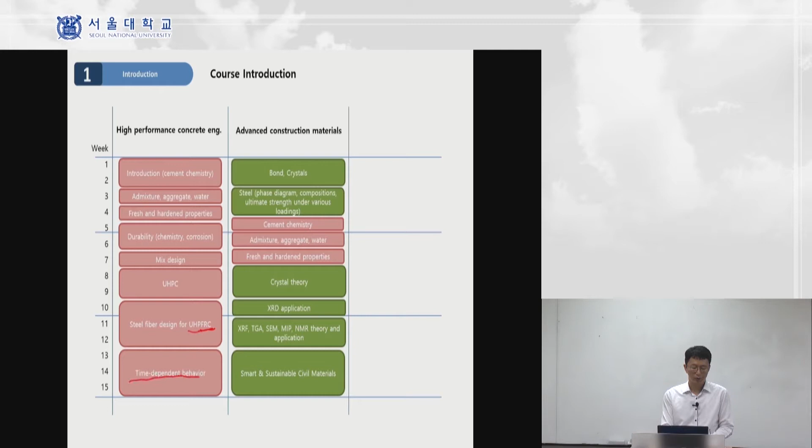In this class, high performance concrete engineering, basic knowledge on cement chemistry will be given, and how to produce the concrete materials - we have to mix aggregate and water and cement and also other admixtures together. So all these material properties of each ingredient of the concrete materials will be covered. Also mix design for typical strengths of concrete material, and mix design for high performance concrete material and ultra high performance concrete, and also ultra high performance fiber reinforced cementitious composite or fiber reinforced concrete will be covered, and time dependent behavior will be the last topic of this class.

So let me tell you first why concrete is so complicated and so difficult to predict its material properties. Let's see - this is very typical, the most important material property of concrete material is the strength, right? Concrete strength.

So if I want to build bridges or I want to build an apartment, then we have to design - we have to satisfy the strength of the concrete materials. Then what kind of procedures do we have to follow, what kind of mix proportion, what is the requirement for each ingredient of concrete materials - we have to decide, right?

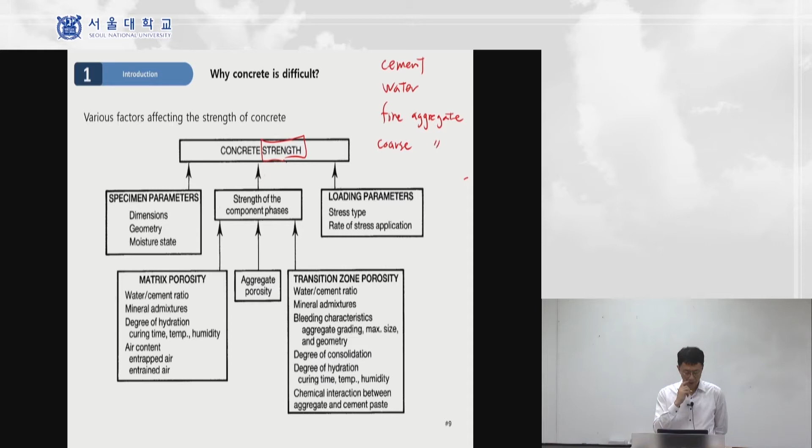So that can be the cement and water, the fine aggregate, and coarse aggregate. So cement and water, fine aggregate and coarse aggregate - among these 4 ingredients for concrete materials, only the reacting component is the cement. There's no chemical reaction between fine aggregate and water, or fine aggregate with cement. Only these 2 - cement and water - have some kind of chemical reaction.

These are inert components. So this is the basic ingredient of concrete materials, and you will see in this class later these components are getting more and more complicated because of many issues that I will explain later.

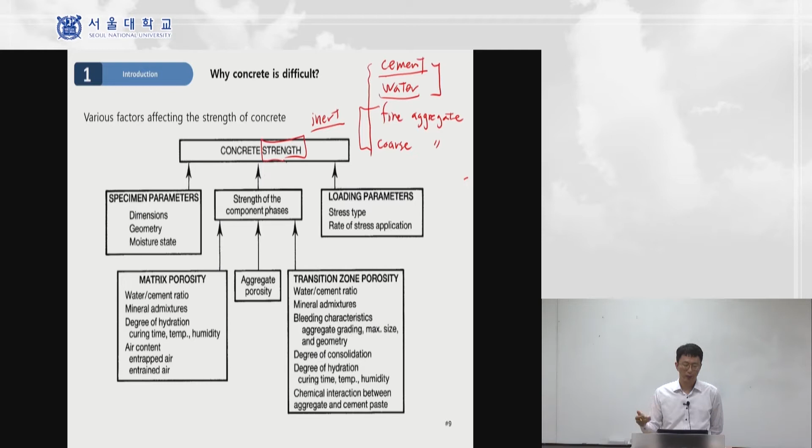So let's see, we have to determine the strength of concrete, FC prime. This is the compressive strength of the concrete materials at a certain date - it can be 28 days or it can be 7 days. But these are all variables that will affect the concrete strength. If you test a different shape of specimen, then the strength will be different. If you test a cube specimen versus a cylinder specimen, the strength will be different.

Now, that is a natural phenomenon of concrete materials. If you apply fast loading or slow loading, or different loading conditions, then the concrete strength, as a result of the measurement, will be different. That's also a natural phenomenon of concrete strength. And also the matrix - if you see the matrix porosity, that means as a result of the chemical reaction between the cement and water, it will be cement hydrate.

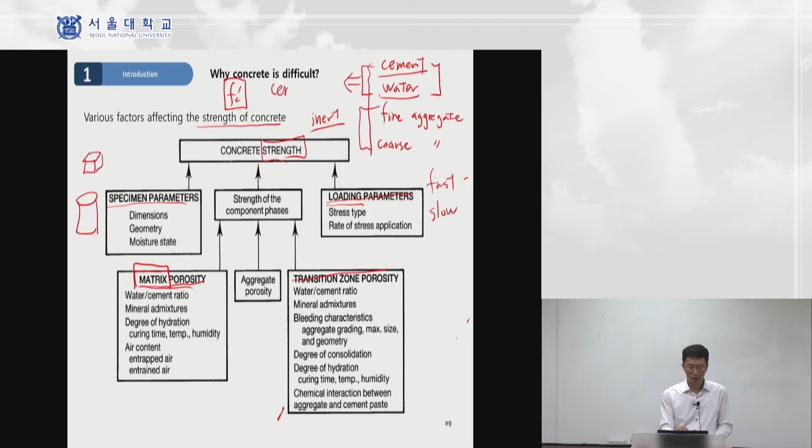Cement hydrate, that is what we call the matrix. Matrix porosity also affects concrete strength. What kind of variable determines matrix porosity? Water to cement ratio, mineral admixture, degree of hydration, curing time and temperature, humidity, air content - all these parameters affect the matrix porosity, and this affects the properties of the cement hydrate.

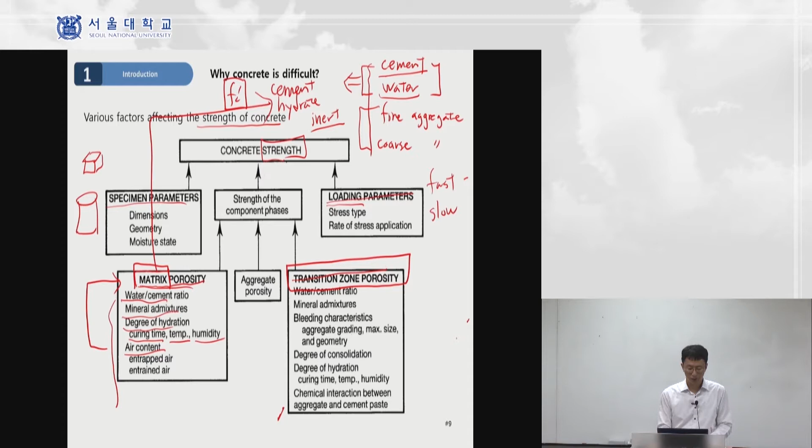Even more difficult factor is transition zone porosity. There are even more variables affecting the transition zone porosity of the cement hydrate. So let me draw a schematic diagram of concrete materials.

This is the volume of concrete materials, and we have coarse aggregate. Then the remaining volume is supposed to be filled with fine aggregate.

Typical size of the coarse aggregate is 25 millimeter, so you can get a sense of the scale of this material. Fine aggregate is less than a few millimeter - few millimeter to 2 to 3 millimeter. So this is the scale of the concrete materials.

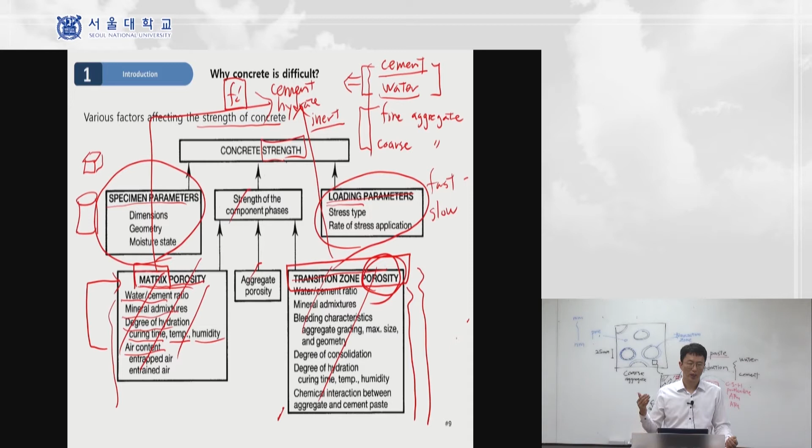Anyway, in one line, concrete material is very heterogeneous and very complicated material. This is the reason why we have to learn about concrete and concrete structure at the graduate level, or even at the undergraduate level class, or even for graduate class, like you guys.

This is the cement factory, a modern cement factory. As you can see here, we start to burn limestone, which is CaCO3, at very, very high temperature.

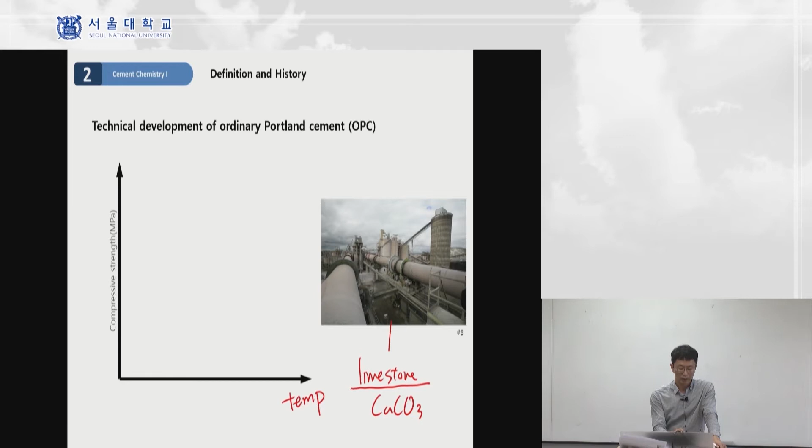This is the temperature we use today, but at early ages, for example the age of ordinary Portland cement, which we call OPC, it's already been 200 years. If you imagine the situation 200 years ago, it was very difficult to burn limestone at very high temperature because they were not trying to burn a small quantity, but a huge quantity of limestone materials.

So there was definitely a technical challenge to burn a huge quantity of limestone at very high temperature. At that time, for example 200 years ago, the firing temperature was not very high, so the cement quality was very low. But nowadays, we can use this kind of technical system to burn limestone at very high temperature with great quality control and huge quantity, so the quality will be increased significantly.

At that time, it could be less than 600 degrees Celsius, but nowadays it is more than 1450 degrees Celsius. As a result of this higher firing temperature to burn limestone, a raw material for cement, we were able to increase the quality of the OPC. And as a result, we can increase the compressive strength and other properties as well, such as long-term performance, tensile capacity, Young's modulus—all these mechanical properties were increased by increasing the firing temperature of the limestone. So this is the brief history of the cement material.

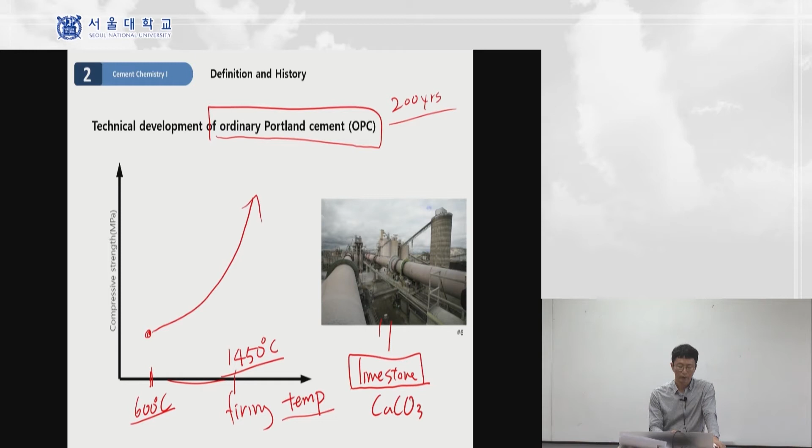Let's take a look at the formulation of modern cement, OPC. We have to mix clay and limestone together, and burn that mixture at a very high temperature, such as 1450 degrees Celsius, in a very huge quantity.

We can imagine this is very difficult to uniformly burn the huge quantity of materials. This is definitely a technical challenge, because some regions' temperature will be higher than 1450, and some regions' temperature will inevitably be lower than 1450 degrees Celsius. Anyway, we have to heat this mixture of clay and limestone at very high temperature, and we gain this kind of material.

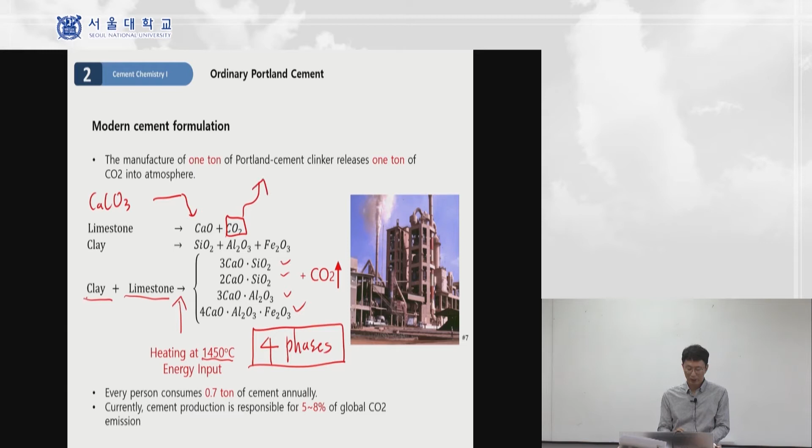These are called phases. Mainly we get 4 main phases. Limestone will decompose, because limestone's chemical formula CaCO3 decomposes into CaO and CO2, which is released. And the clay's oxide composition is mostly silica, alumina, and ferrite.

So this one is silica, alumina, ferrite. Si means silicon, SiO2 indicates silica, Al means aluminum and Al2O3 means alumina, and Fe is iron and Fe2O3 is ferrite.

So OPC, ordinary Portland cement, is not a single material. This is a mixture of these 4 phases. Then what is the mix ratio of these 4 phases? You will learn in the next lecture about the impact of changing the weight ratio of all these 4 phases, because they obviously have different chemical reactions, which will impact the properties of composite materials in different ways.

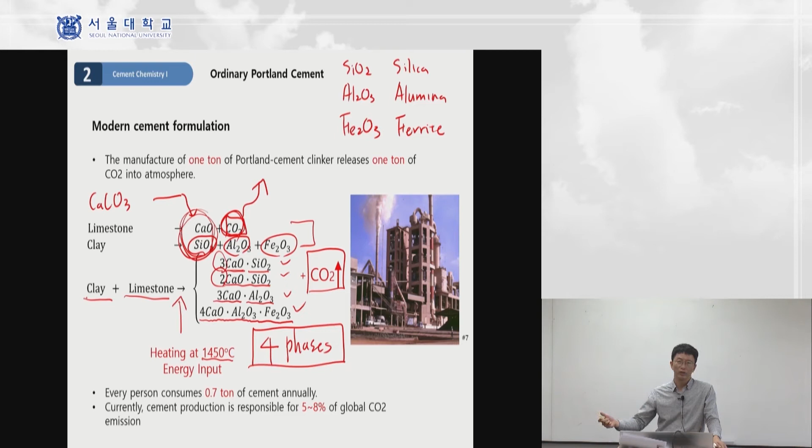And because of this huge quantity of CO2 emission, cement production globally is responsible for 5 to 8% of global CO2 emissions. This is the largest number of contribution to global CO2 emission, even much higher than transportation and other industries. This is the largest number.

But the reason people don't know much about this issue is because we don't have many other options to replace this OPC with other so-called green cement or green concrete. I will tell you more about this issue later.

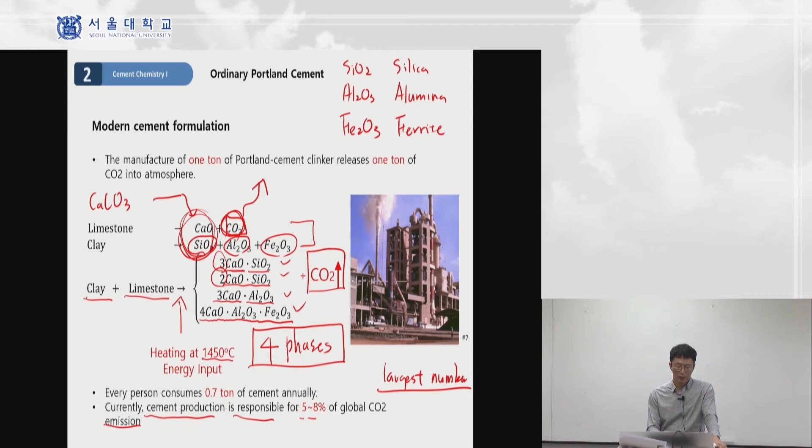So let's take a look at the result of the chemical reaction.

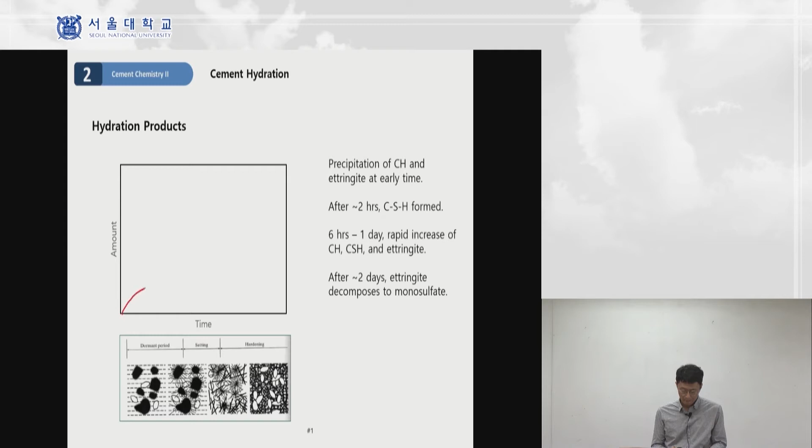First, this is the graph of CSH formation from the chemical reaction of C3S and C2S, right? And as a result, we also have CH formation from C3S and C2S, right? And then a different color here.

This is ettringite formation from the chemical reaction between C3A, gypsum, and water. Then this is going to be monosulfate.

And as the hydration process goes on, the porosity will be decreased. This is porosity. So typically this is 30 minutes, and this is typically 6 hours. And after 2 days, we can get this monosulfate formation.

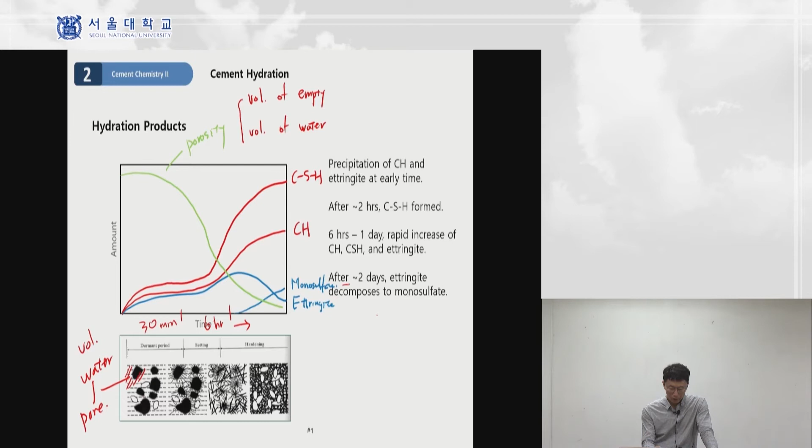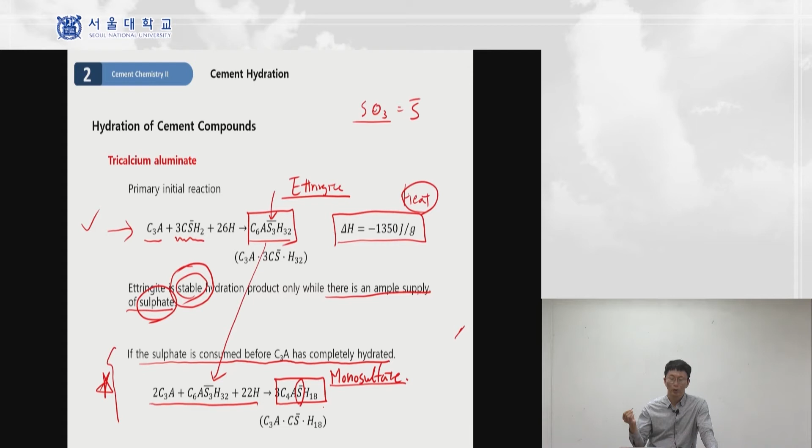So if you think about this monosulfate formation, if the sulfate is not enough, then at some point here, there's a decrease of the ettringite phase, but there's an increase of the monosulfate. So this is the case. If sulfate is consumed before C3A has completely hydrated, this additional hydration goes on to produce monosulfate from ettringite. So this is the point.

This is the reason why we have to see this kind of monosulfate production and the reduction of the ettringite crystal. So this black means the calcium silicate hydrate, and this is calcium hydroxide, and this needle shape is ettringite crystal, and eventually all of this water-filled region will be filled with crystals, right?

And the calcium silicate hydrate, if you see this phase, for example, this one, there's a calcium silicate hydrate formation at the surrounding part of the cement particles, because cement will react with water, right? So this is unreacted cement, and this is the newly formed hydrated phases. So this is the CSH, and this is still OPC, because the surrounding part is much more exposed to the water.

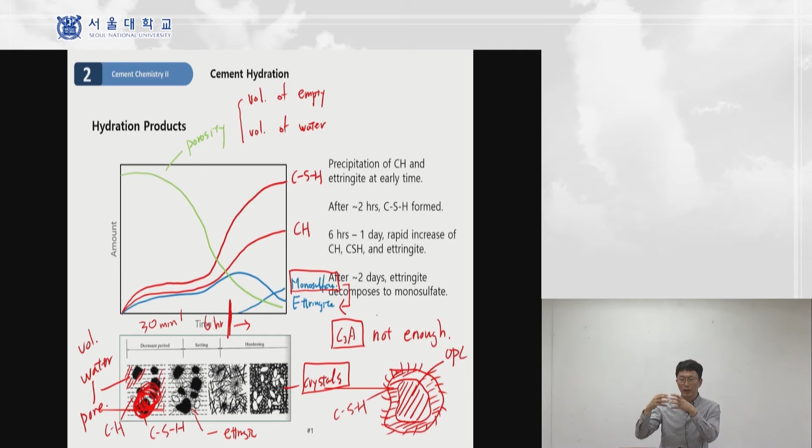So this is likely to react with water easily, but the inner part of the OPC has to contact with the water to form hydration product, but the water here should go through the hydration product to react with the OPC. Okay, so eventually all of this OPC will be reacted.

So let's say this is one cement particle, and this is a combination of C3S, C2S, C3A, and C4AF, obviously, and also gypsum. Right? They are mixed together. This is a cement particle. This is one cement particle, and all these are water, right?

So they are surrounded. This cement particle is surrounded by water. So there is a formation of this calcium silicate hydrate. This is also kind of a needle shape. And this calcium silicate hydrate, this is a dense phase, dense.

Okay, because it has strength, right? The reason why concrete has some strength is because calcium silicate hydrate is the main contributor to the strength of this composite material. So there's a reduction of the cement particle, because this part has reacted with water to form CSH, right? So still it has a cement part here. This is unreacted cement - unreacted, still intact, unreacted part.

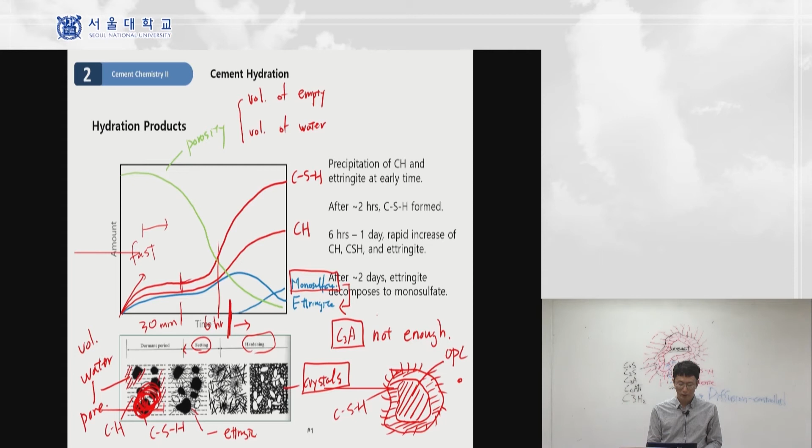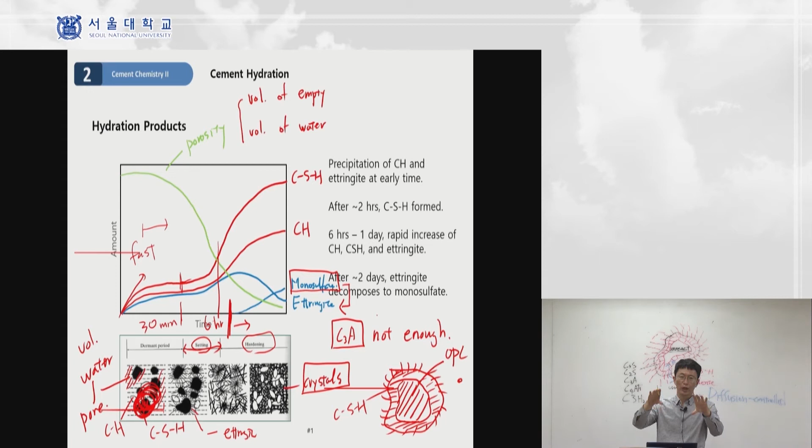After the setting, we call it hardening. So setting is a region here. For example, setting is important when we cast concrete to fill a foundation - next we have to put more concrete to fill that void. But this next casting process should be done before the final setting time of the first cast.

So setting involves the initial set time and the final set time. The next casting process should be done before the final setting time of the pre-existing concrete. Standards like ASTM, Korean standard, or European standard propose how to measure the setting time. Setting is something between true solid and liquid, you can imagine.

Why do we have this kind of set behavior? Basically this is a liquid to solid transition, due to the formation of calcium silicate hydrate and ettringite crystal. These are the dominant phases for concrete to have strength. But from a volume perspective, calcium silicate hydrate will occupy much of the volume, 60 to 70% of the given system.

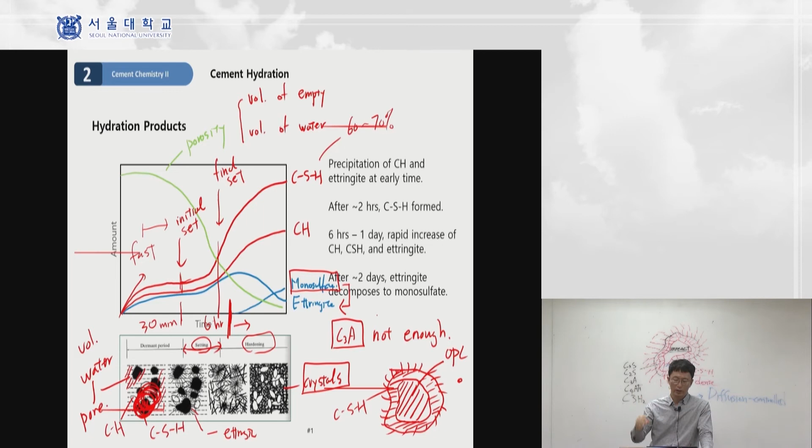Not only do we have calcium silicate hydrate and different crystal structures in the given volume, we also have pores - pores are everywhere in concrete. In between the calcium silicate hydrate sheets, there's interparticle pore spacing, which is empty region. There's also capillary void, and entrained air bubbles for special purpose, and entrapped air void. If you look at the scale, this is nanometer scale, this is micrometer scale, and this is millimeter scale.

The crystal structures are complicatedly intermixed together in a given volume, but also the pores - pores are everywhere at different scales. All of this makes concrete application or concrete study complicated.

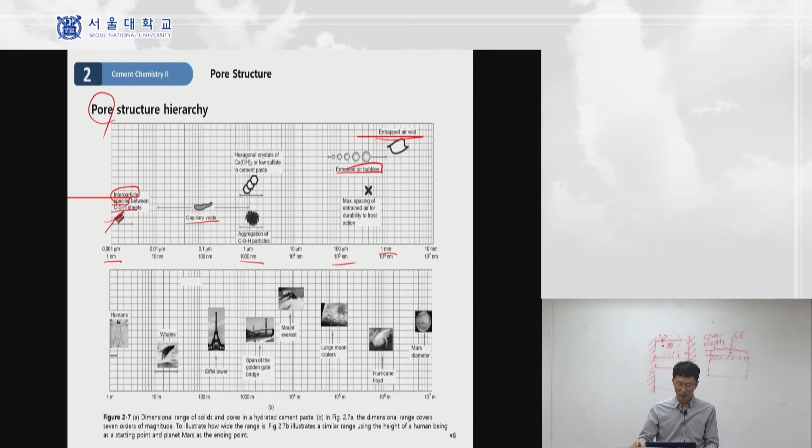So pores form an intermixed pore network: interlayer water in the calcium silicate hydrate, physically adsorbed water on the surface of the calcium silicate hydrate, and void filled with water in the capillary pore. Like I mentioned before, we treat the water volume as a pore - pore can be empty, but it can also be filled with water, and we treat both of them as pore.

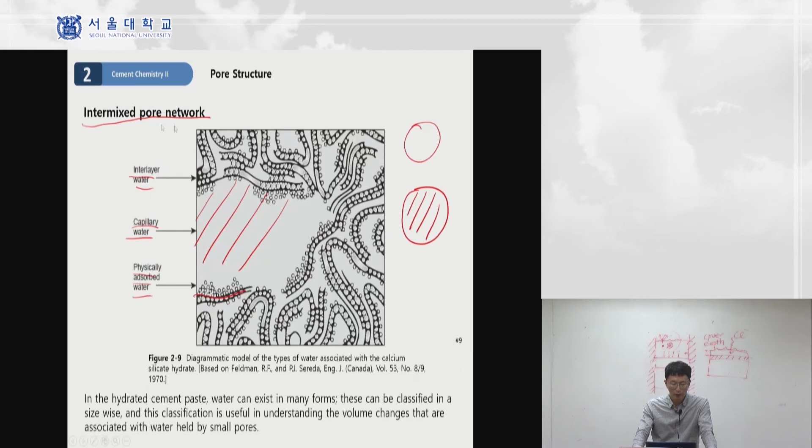So we have the crystal structure solid, and also the pore network - this is also the solid network. This schematic diagram indicates why the transition zone is important, and also the reason we have aggregate here. This is the non-reacting part, it's intact, and cement will hydrate the volume except this aggregate. So they have a different bulk cement paste, but a region of 30 to 40 micrometers or 100 micrometers surrounding the coarse aggregate - we call that the interfacial transition zone, ITZ, because this will determine the strength of this composite, overall material.

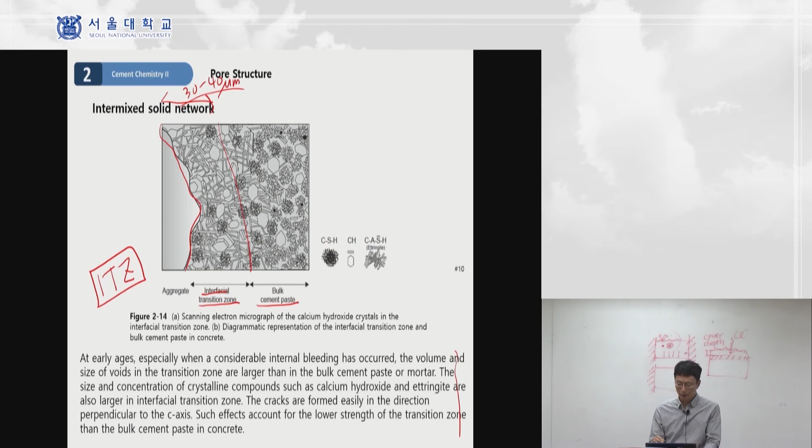The strength, such as FC prime of ITZ, is smaller than FC prime of coarse aggregate. And if the FC prime of cement paste is considered, then the ITZ strength will determine the strength of the composite material. This is true for normal strength concrete, but for high strength concrete, strength is high, and we can make this ITZ strength stronger. Then this equation is not valid anymore for high strength concrete, so they have a different mechanism to achieve high strength.

So why do we have the weakest link surrounding the coarse aggregate? Because of the ITZ. Then why does ITZ have weaker strength? Because we can see the size of crystals at that transition zone - in this transition zone, the size of crystal is large, and pores are also large. So basically there's more room or more space for hydration reaction at that specific region.

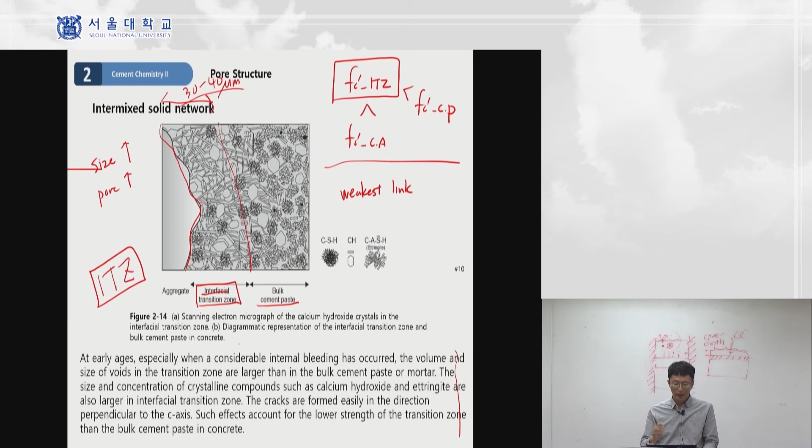And there's less formation of calcium silicate hydrate. If you compare the interfacial transition zone and the bulk cement paste, we can see there's more formation of calcium silicate hydrate in this bulk region - there's just more calcium silicate hydrate there.

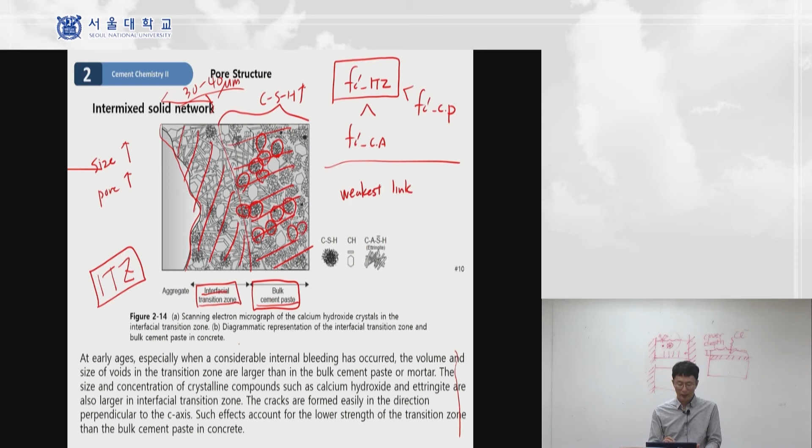And then there's less volume of calcium silicate hydrate here. The question at this point is why there's less volume of calcium silicate hydrate in this transition zone. You will learn later why we have more space, a larger crystal at that transition zone, and less volume of calcium silicate hydrate. The short answer is because the water to cement ratio at that specific zone is higher than at the other part.

So that means the aggregate contains water itself, or it can absorb mixing water. Before that water reacts with cement, the aggregate will absorb water very fast. So locally it has higher water to cement ratio characteristics, meaning higher volume of water. So there's more space, more pore, because pore is the volume of empty region, and pore filled with water - both are considered as pore. So there's more space.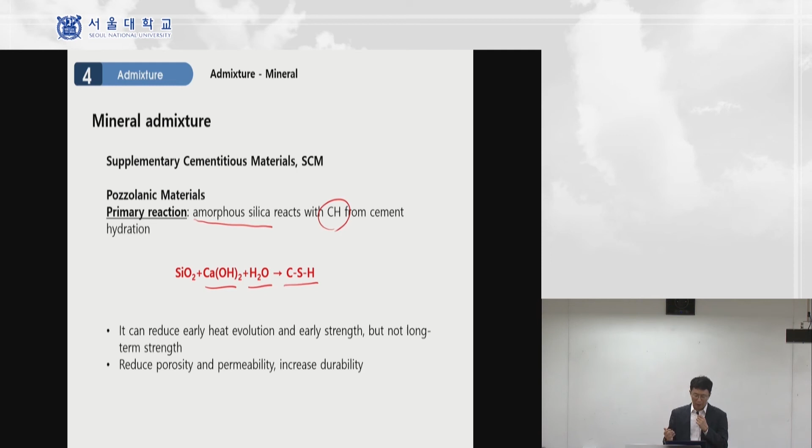This is calcium hydroxide and water, producing calcium silicate hydrate. Please try to remember this chemical reaction, because this SiO2 from pozzolanic material, SCM, and the CaOH2 - if you recall, the origin of the CaOH2 is coming from the hydration reaction. C3S plus water will produce CSH plus CH. C2S plus water will also produce CSH plus calcium hydroxide.

So this calcium hydroxide, you will see later, has a very important component from the chemistry perspective. Like we learned previously, calcium silicate hydrate is the most important component in terms of strength. Without calcium silicate hydrate, it does not have binding property - binding sand or gravel to have strength from the composite material. So having more calcium silicate hydrate, we can expect higher strength.

Then what is the role of calcium hydroxide here? Calcium hydroxide crystal - part of this calcium hydroxide produced from cement hydration will dissolve in the water. Some will stay, some will be stabilized as a crystal, but some will be dissolved in the water because we put water at the beginning. Water is a primary ingredient for making concrete.

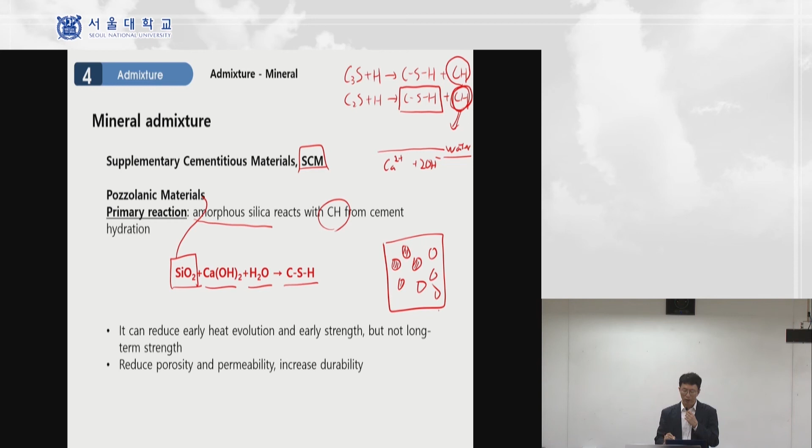And also the calcium silicate hydrate contains water between the interlayer. So you can expect, although we cannot see the water directly, we can explain a lot about the concrete by knowing that it contains water inside.

So if we can extract this kind of water, the pH of this water is very high, 12.5. This means this pore solution - the liquid filled in the pore - is a highly alkaline solution. Even this is a very toxic level, 12.5, because neutral is 7.

So the pore solution is actually highly alkaline, and the reason is because of the dissolution, partial dissolution of calcium hydroxide in the water, which increases the pH, because pH is the concentration of hydroxide ions - hydroxide is OH minus. So because of the dissolution of calcium hydroxide in the water, it has high pH. This calcium hydroxide can come from the pore solution in the pores of concrete. It is a very interesting phenomenon that the amorphous silica in fly ash or silica fume will react with this calcium ion and OH minus hydroxide and water to produce calcium silicate hydrate.

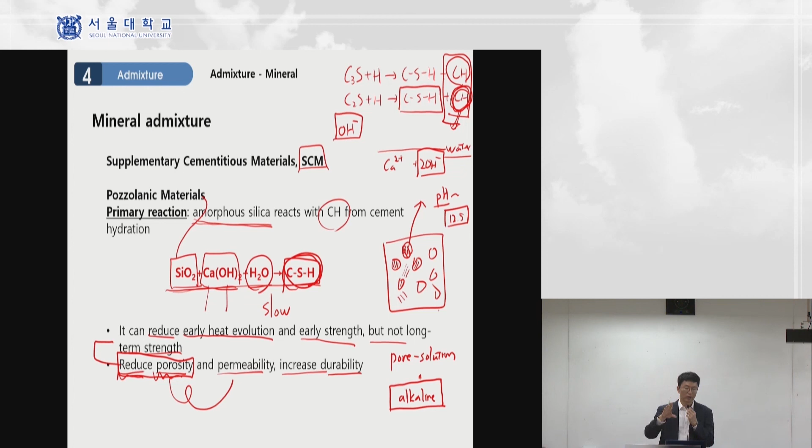So you may wonder why we can reduce this porosity. Reduction of porosity is related to long-term strength development, and reduction of porosity is related to reduction of permeability. Permeability is the degree of water penetration in the concrete, because concrete does not have closed form pores - pores are complicatedly intermixed together.

As time goes on, water will penetrate through the concrete specimen - that is the definition of permeability. Permeability can be reduced, meaning we can enhance long-term performance. So the main question here is: how can we achieve the reduction of porosity?

For the pozzolanic reaction, the main question is how can we reduce porosity? In the cement chemistry notation, we have silica, calcium hydroxide, and water, forming calcium silicate hydrate, similar to the hydration product from OPC hydration.

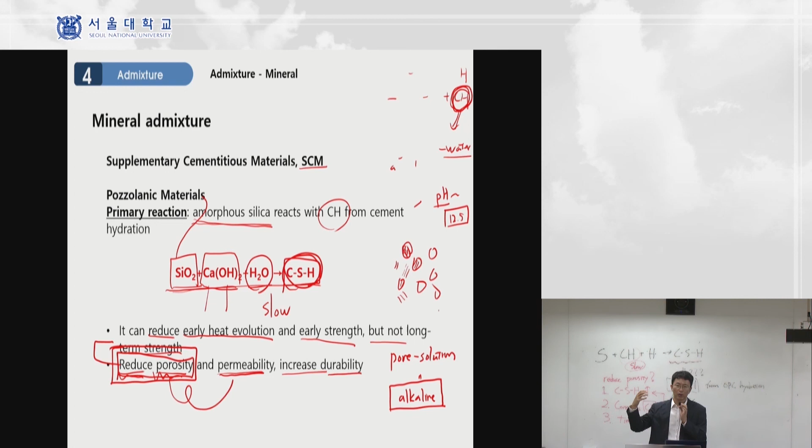And lastly, the time difference - because this reaction is very slow. What that means is the pozzolanic reaction is slow, but its effect on material properties is very high. This is very good, because when the pozzolanic reaction occurs, cement hydration has already started and already occurred.

OPC hydration starts almost immediately, but the pozzolanic reaction needs time because it does not begin at the start - it needs the hydration product. Without calcium hydroxide production from OPC hydration, this reaction will not occur. So this reaction needs time, and this time requirement is actually very beneficial for reducing porosity, because when the pozzolanic reaction is active, the structure already has some strength, small regular pores, and the pozzolanic reaction is very efficient at filling the remaining pores in the concrete.

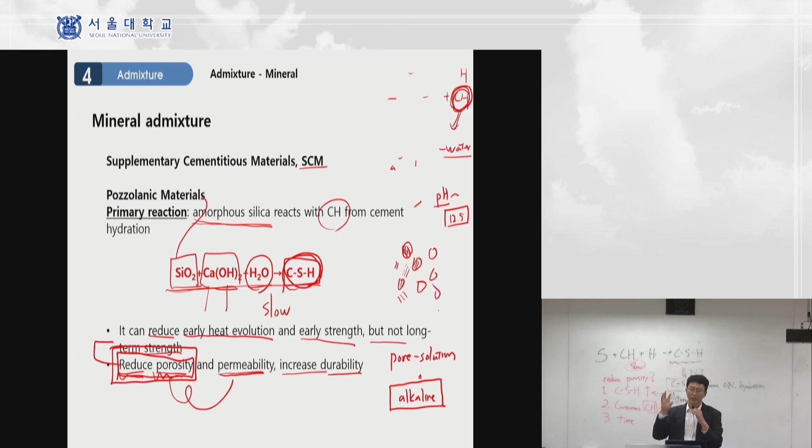So you can expect that if cement hydration and the pozzolanic reaction occurred simultaneously, the pore structure would be worse. But if OPC hydration occurs first, and the pozzolanic reaction is added later, this time-delayed addition is very efficient.